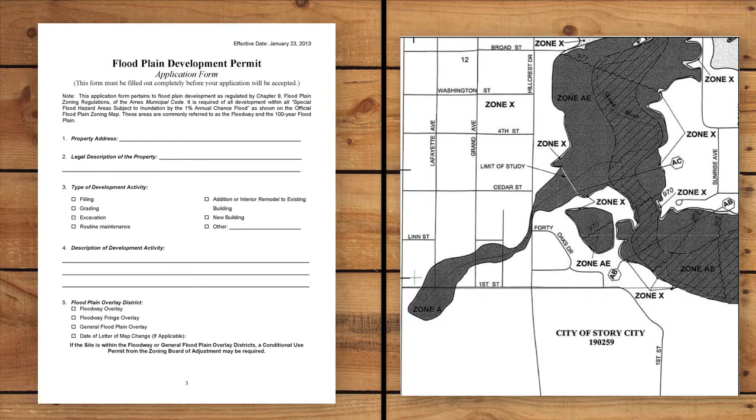As we've discussed in previous videos in this series, in order for a community to participate in the National Flood Insurance Program, it must adopt a floodplain management ordinance that meets the minimum requirements of the NFIP. The NFIP requires the community to establish a local permitting process for any development that occurs in the mapped special flood hazard area. Prior to the start of any development in the special flood hazard area, all necessary federal, state, and local development permits must be obtained.

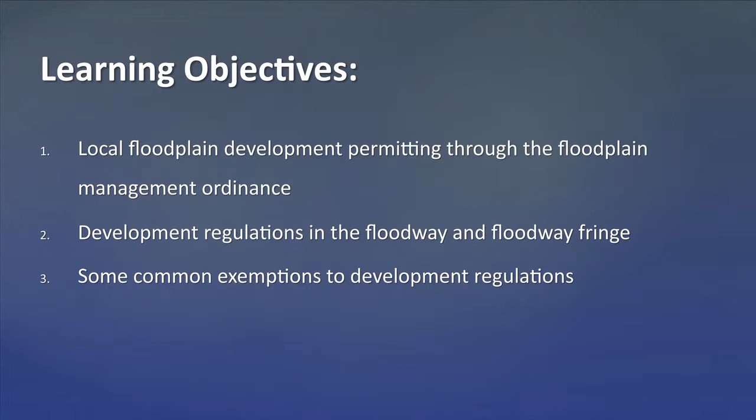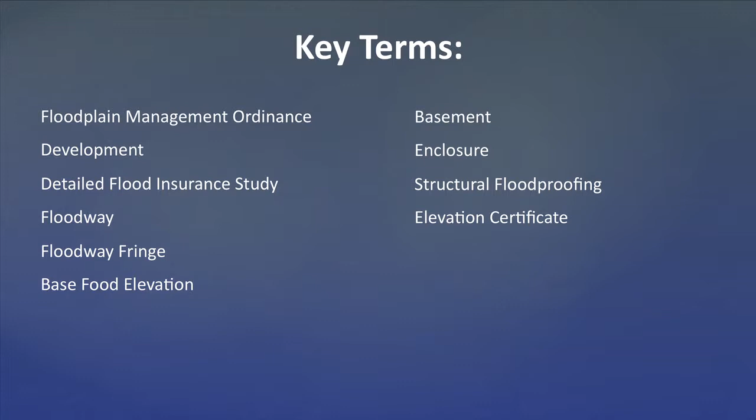In this video, we will address local floodplain development permitting through the Floodplain Management Ordinance, development regulations in the Floodway and Floodway Fringe, and some common exemptions to development regulations. These key terms and acronyms will be used during this presentation. You can find the terms and their definitions at the web address on screen.

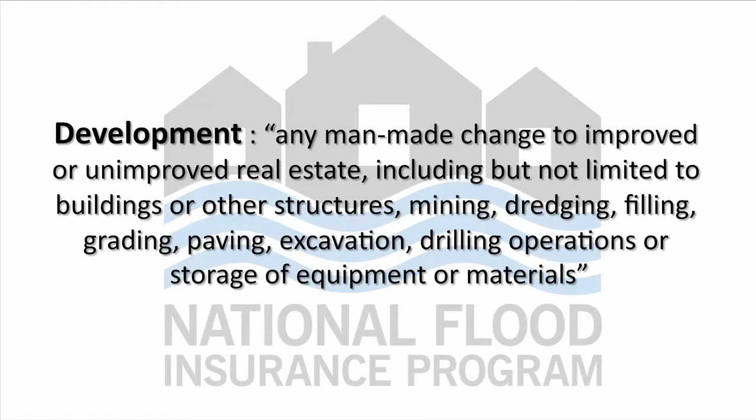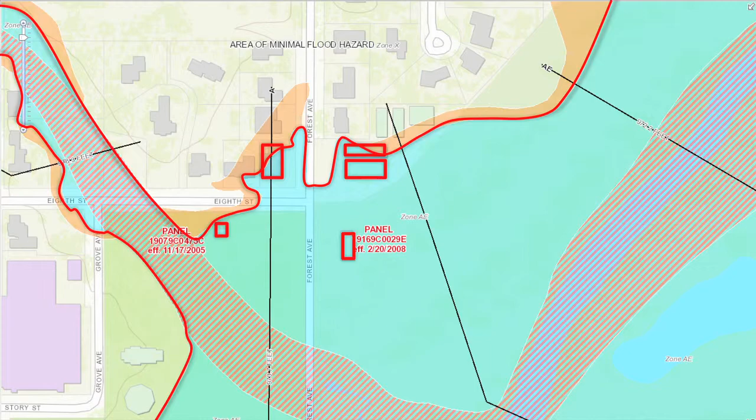The NFIP defines development as any man-made change to improved or unimproved real estate, including but not limited to buildings or other structures, mining, dredging, filling, grading, paving, excavation, drilling operations, or storage of equipment or materials. As you can see, this definition is quite broad. Any development proposed to be located in the special flood hazard area requires a floodplain development permit from the local community. The community's ordinance requires that development in the special flood hazard area must also obtain any other permits that may be required by federal, state, or local governments before construction begins.

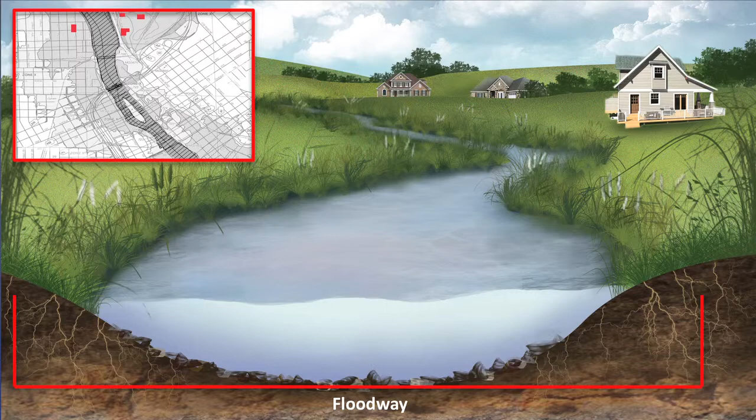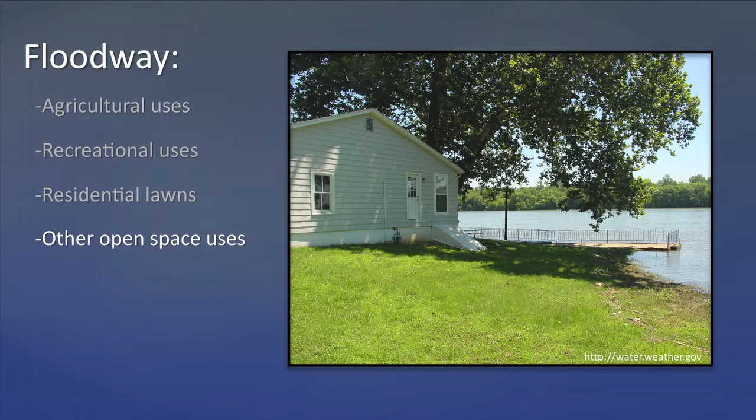As was discussed in video 9 of this series, the floodway is the portion of the floodplain that must be left unobstructed to allow the discharge of the base flood event without increasing flood heights. And while development can be allowed in the floodway, it cannot result in any increase in the base flood elevation. Local ordinances typically permit activities such as agricultural uses, recreational uses such as golf courses, residential uses such as lawns and parking areas, and other open space uses similar to those just mentioned, so long as they do not include the placement of structures, fill, and other obstructions in the floodway.

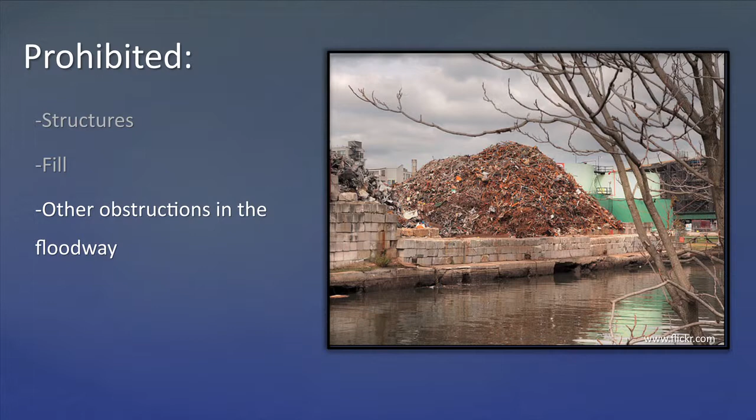Other types of development may only be allowed when it is demonstrated that they will not result in any increase in flood stages. Applications for proposed development in the floodway must include certification by a registered professional engineer that the project will result in no rise in the base flood elevation. A no-rise certificate ensures that the development project will not increase flood heights.

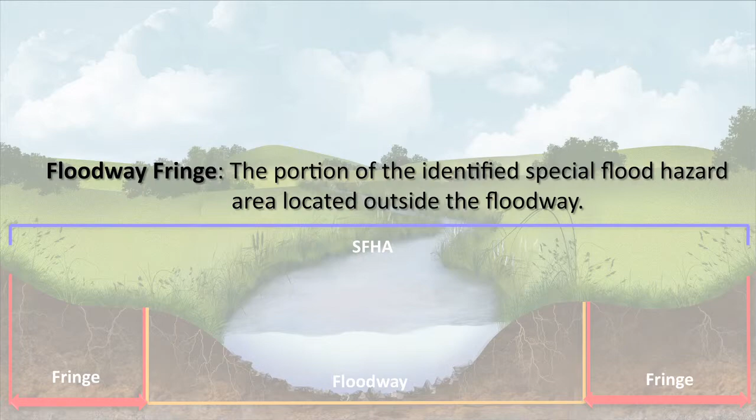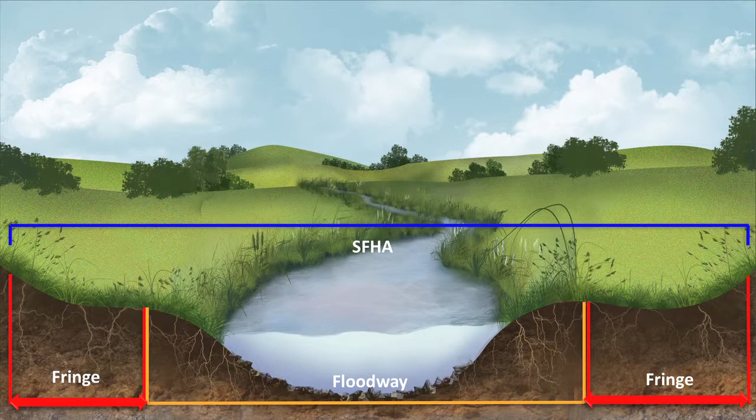The floodway fringe is that portion of the identified special flood hazard area located outside of the floodway. Local regulations allow most types of development in this area, provided that the development satisfies the criteria outlined in the community's floodplain management ordinance. The criteria are designed to ensure, among other things, that the development will not be damaged by the base flood event. In this video, we will only discuss the requirements for buildings built in the floodway fringe.

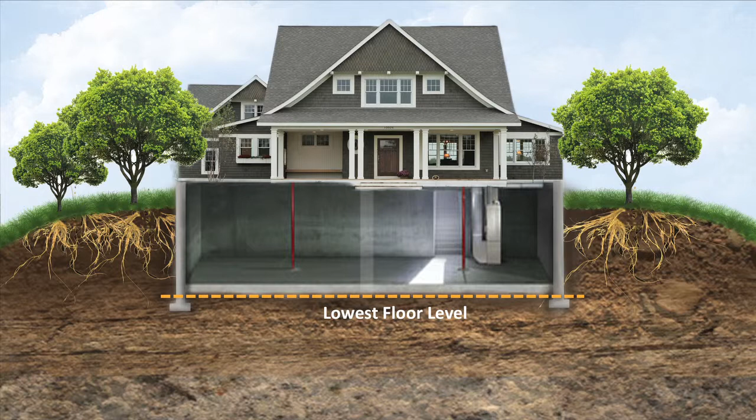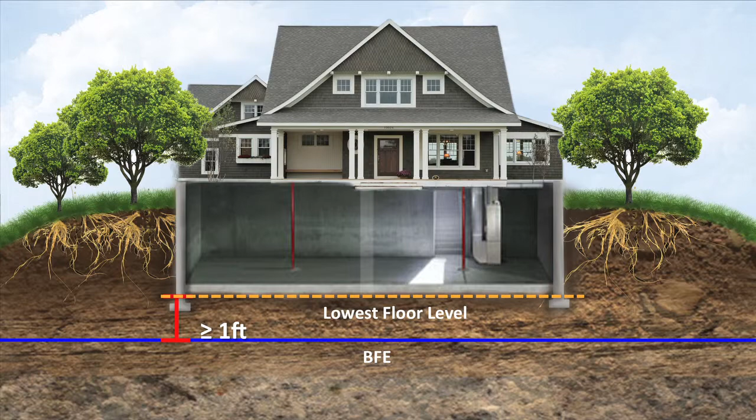Elevation is one method that is used to protect buildings located in the floodway fringe from damage by flood, and is the only acceptable method for protecting new or substantially improved residential structures. The community's floodplain management ordinance requires that the lowest floor for residential structures, including recreational cabins and factory-built homes, must be elevated at least one foot above the base flood elevation. The NFIP considers the floor of a building's lowest enclosed area, including basement, to be the lowest floor for both regulatory and insurance rating purposes.

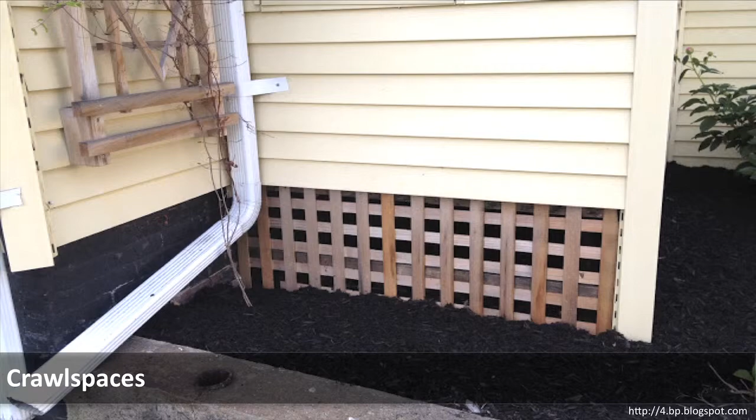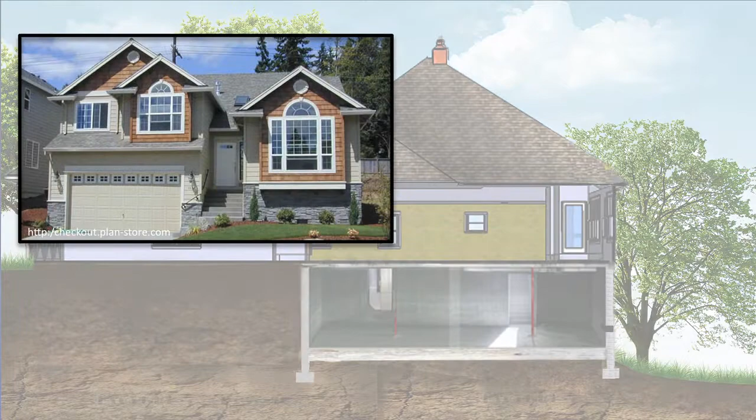Elevation is typically achieved through the use of fill, piers, posts, or columns. The lowest floor can also be elevated on walls, crawl spaces, or other similar above-ground enclosures. However, in order for these enclosures to not be considered lowest floor, they must be constructed using materials such as concrete that are resistant to damage by flood. The enclosed area must be unfinished, no carpet, paneling, or drywall, and used solely for low-damage potential uses such as parking, building access, or storage.

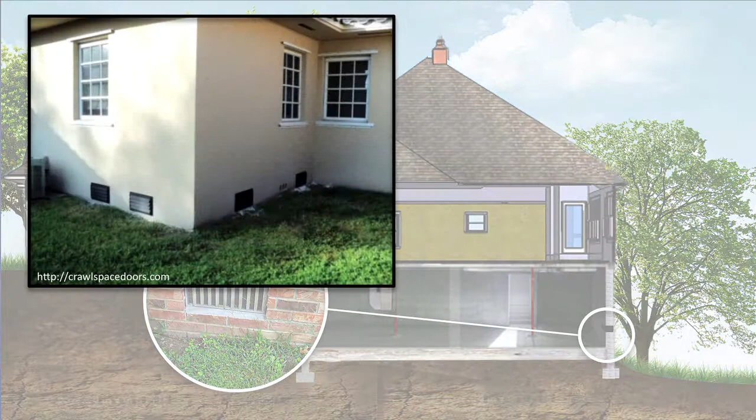Utilities such as furnaces, circuit breakers, and water heaters must be elevated at or above base flood elevation, or be protected by watertight enclosures, utility shafts, or anchoring systems. Walls must include openings or vents placed on at least 2 walls that are sufficient to allow water to automatically enter and exit the building to help reduce hydrostatic pressure on the structure.

Doors and windows are not acceptable openings as they do not automatically allow water to flow into and out of the enclosure. And the enclosed area must not be a basement as defined by the NFIP. The NFIP defines a basement as any enclosed area of a building, including any sunken room or sunken portion of a room which has a floor that is below ground level on all 4 sides.

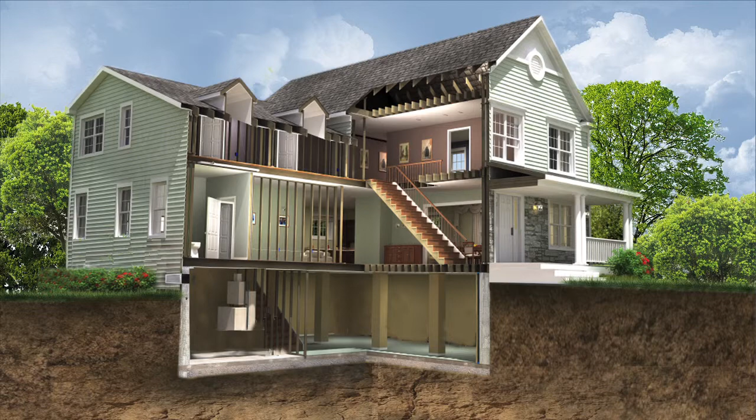This is important because what is typically referred to as a walkout basement is not considered to be a basement as defined by the NFIP, meaning it can be designed and constructed to satisfy the previously discussed criteria for an enclosure below the lowest floor.

To ensure that a building has been constructed in compliance with these elevation requirements, communities require the individual proposing the development to provide an elevation certificate. An elevation certificate is a document completed by a licensed surveyor or engineer that attests that the lowest floor of the structure is at or above base flood elevation.

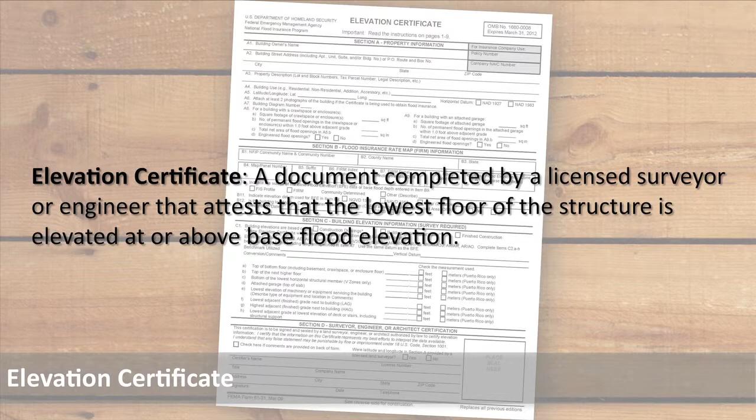In the case of structures elevated on a crawl space or other enclosure, it also confirms whether utilities have been properly elevated and that sufficient vents or openings have been installed in the walls. This information can then be used to ensure compliance with the local floodplain management ordinance or to establish flood insurance premiums.

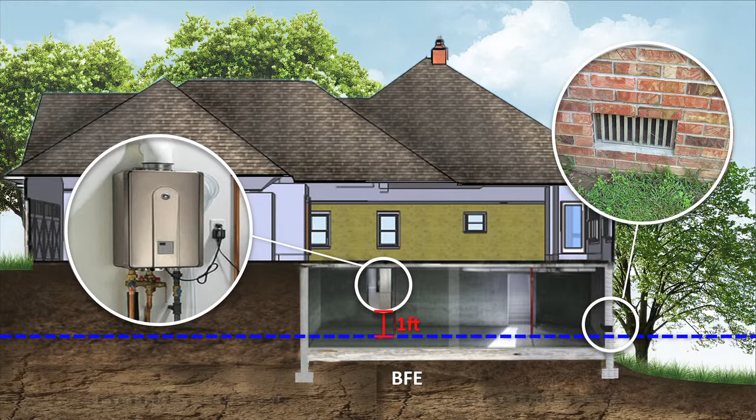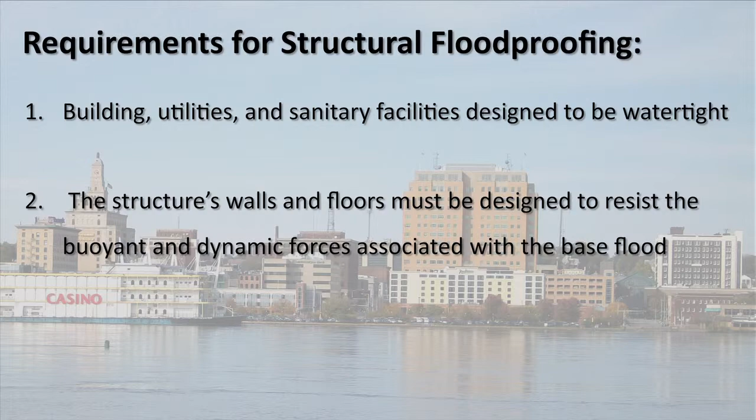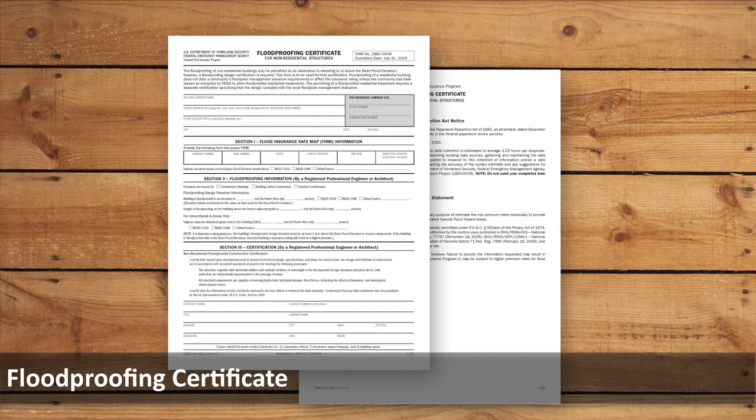For non-residential buildings, structural floodproofing methods are an acceptable option for providing flood protection. In order for a structure to be considered structurally floodproofed, it must be designed, along with utilities and sanitary facilities, to be watertight. The structure's walls and floors must also be designed to resist the buoyant and dynamic forces associated with the base flood. To ensure that proposed floodproofing measures satisfy these criteria, communities require the individual proposing the development to provide a floodproofing certificate.

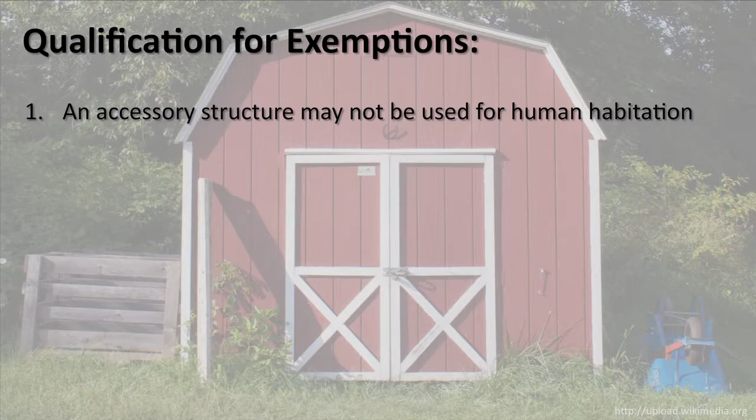Certain accessory structures, such as residential detached garages or sheds, may be exempted from building elevation requirements if they meet certain criteria. Eligible structures may not be used for human habitation and must be firmly anchored to prevent flotation. Recreational vehicles can also qualify for an exemption from elevation requirements. A recreational vehicle is defined as a vehicle that has been built on a single chassis, that is 400 square feet or less in size, and that is self-propelled or towable.

To qualify for an exemption from the elevation requirements, a recreational vehicle must be fully licensed and ready for highway use and located on one site for less than 180 consecutive days. A recreational vehicle is considered to be ready for highway use when it is on its wheels or jacking system and only attached to the site by quick disconnect type utilities and has no permanently attached additions. If a recreational vehicle does not meet all of these conditions, then it must comply with extensive elevation and anchoring requirements to ensure that it is protected from the base flood event.

Today, you have learned about local floodplain management ordinances and how these ordinances regulate development in the floodway and floodway fringe.